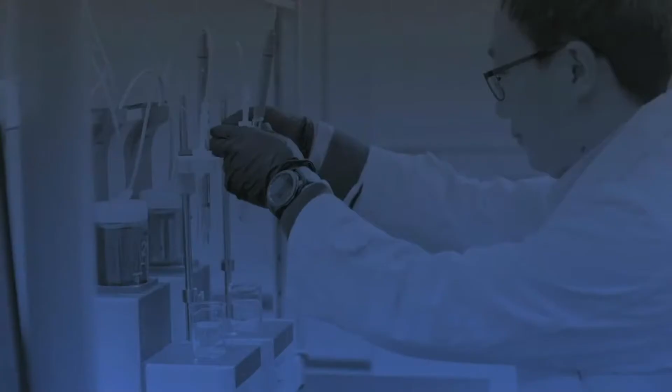Even before the current global pandemic, society was in the midst of a global data explosion arising from our world of interconnected devices. The semiconductor industry is in need of constant innovation to meet the demand for high-performance processors and memory devices. Innovative solutions developed in a rapid time frame is a must.

Additive manufacturing is one technology which fits the bill by overcoming the current design, manufacturing, reliability, and cost limitations associated with the current technology solutions.

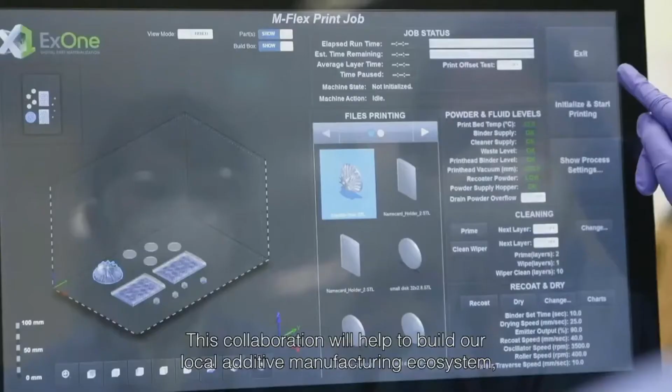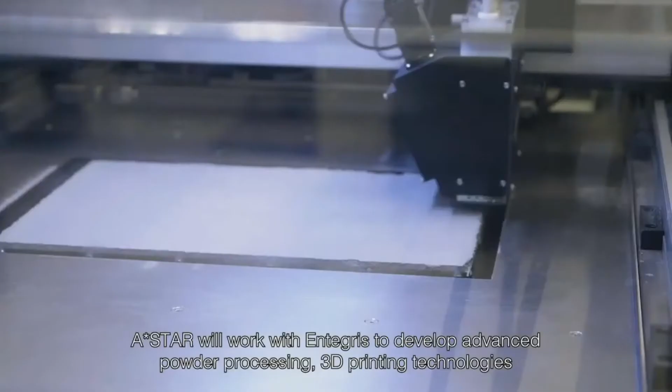This collaboration will help to build our local additive manufacturing ecosystem where Entegris can undertake high-mix, low-volume manufacturing of high-value products in Singapore. A*STAR will work with Entegris to develop advanced powder processing, 3D printing technologies, and testing methodologies for the next generation filtration-related products in Singapore.

We believe this collaboration will strengthen Singapore's presence as a reliable R&D hub for test bedding and development of new innovative processes and products in the world. This will be a solid testimony for our local research capabilities and strong partnership with the industry.

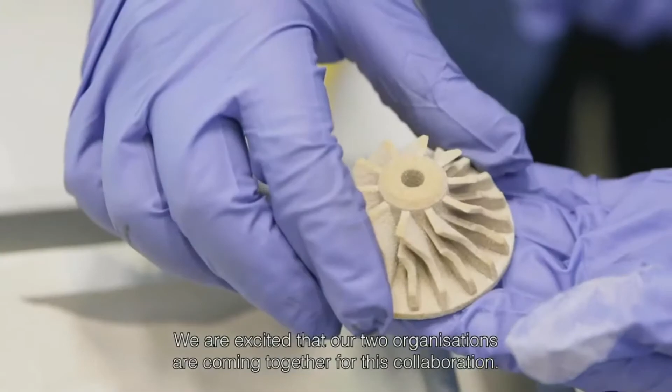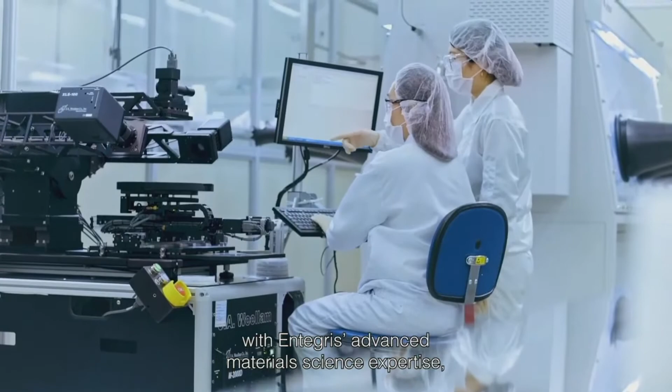We are excited that our two organizations are coming together for this collaboration. Combining SIMTech's deep expertise in additive manufacturing with Entegris' advanced materials science expertise, this would enable the exploration of a much broader array of innovations in product design, with the ability to simulate their performance before creating prototypes.

Such research could identify ways to overcome the current design constraints in traditional manufacturing and lead to discoveries that benefit a wide range of industries, including semiconductor, aerospace, medical, and energy.

With the signing of the MOU, we have fully embarked on the process of joint collaboration formation. We expect the collaboration to yield tangible results in early 2021.

One aspect of this collaboration will focus on the development of additive manufacturing technologies to enable more complex geometrical designs for metal-based membranes and gas filtration solutions.

We expect our research to lead to discoveries that will benefit a wide range of industries and emerging markets. We are certain this joint collaboration will position both SIMTech and Entegris as leaders in the additive manufacturing domain.

We wish the very best for a successful collaboration between Entegris and SIMTech in their journey together.

As part of NAMIC's ongoing efforts to develop and expand the ecosystem and seed adoption, we run annual AM competitions together with our strategic partners.

The most recent competition I want to highlight today is the Global Maritime AM Challenge Rescue Vessel Design Competition. It was envisioned to spur additive manufacturing-enabled innovation in naval architecture and marine vessel design by developing new, efficient designs for rescue craft, utilizing the advantages of AM to create a more compact vessel with autonomous capabilities, better designed for human rescue in difficult waters.

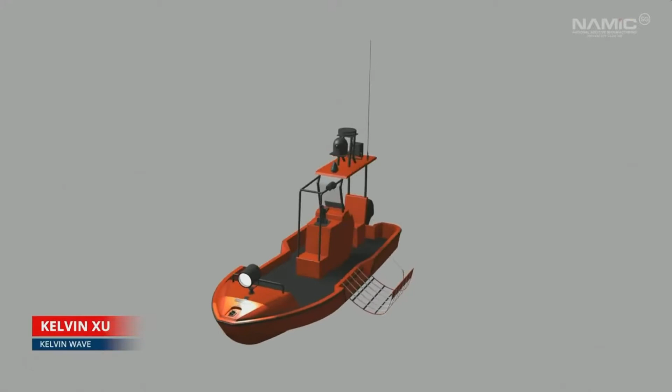KW5.78-60RB has a length of 5.78 meters, breadth of 2.2 meters, and depth of 0.67 meters. It has a fuel capacity of 48 liters to last 4 hours of operation at a speed of more than 8 knots, and can carry up to 8 personnel on board.

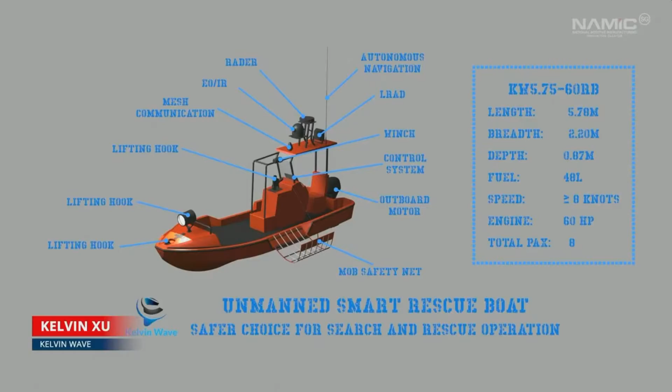KW5.78-60RB has a unique rescue zone with a side shell cutout with a lower slope to allow smooth recovery of personnel at sea without compromising the freeboard design. With the help of an electrical winch to hoist the man overboard safety net, this allows the rescue operation to be totally remote controlled. Now I pass to Kelvin to share more.

Hi everyone, my name is Kelvin Xu. I'm an architect from Kelvin Wave Private Limited. I'm very delighted and honored to receive this award from NAMIC's Global Maritime AM Challenge. A special thanks to the organizers and support teams for providing us such a great platform to showcase our innovative design and ideas, which can be manufactured by 3D printing.

It's a new game changer in the boat building industry, driving towards less waste, less cost, and less time in the manufacturing process. It allows naval architects like me to pursue high precision, better weight control, and good quality of boat design. We are looking forward to designing and building more boats using additive manufacturing in the near future. Once again, we're grateful to the organizers for offering us such a great and inspiring journey. Thank you very much.

Next up, walking away with a prize of $20,000, is Sovereign Group from France. Their submission, Sovereign Search and Rescue New Generation, has earned them first runner-up. Let's hear from their team leader, Matthew Collin.

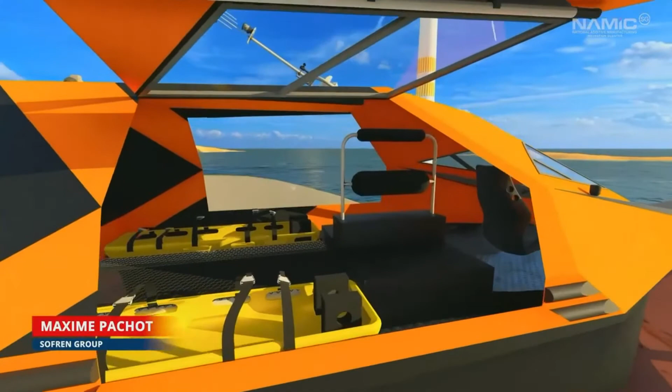It has 3 modes of piloting: classic, with a pilot inside; remotely, from another boat or ship; and fully autonomously. We have innovative features like large butterfly doors, and a net to deploy backwards to receive people at sea.

3D printing was very important for that design, because the propulsion means are fully protected with tunnels now, and all the compartments and deck can be fully printed. We'd like to thank everyone who would be interested in advance to discuss this design with us. Thank you very much, and see you very, very soon.

Finally, coming in first place from France, we have Benjamin Cann with his entry Nemo 3D, a fast and smart additively manufactured search and rescue boat. I'm sure he's eager to share his design with all of us today, so let's bring him on.

Well, it's a true honor to have won first place. It was a very exciting challenge for me, and I did my best to fulfill the requirements. I can only deeply thank the NAMIC team and challenge committee members for taking the time to consider my application and appreciate its value.

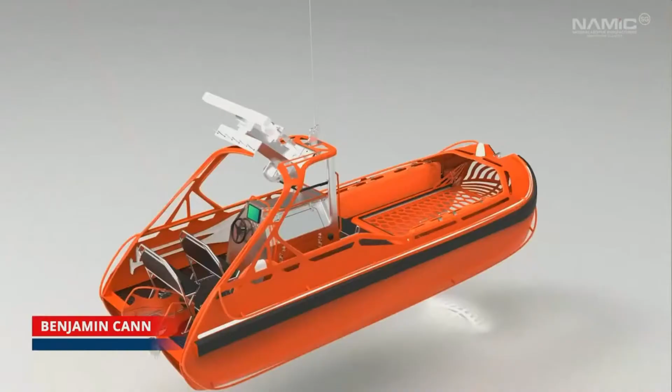It is the first time I designed anything linked to marine application, and it was a pleasure to discover this new field of engineering. I hope to see this vessel for real, and I'm sure it will prove to be very useful and save people. In fact, I can already imagine derivatives of this vessel that are fully unmanned, more compact, without crew or pilot seats.

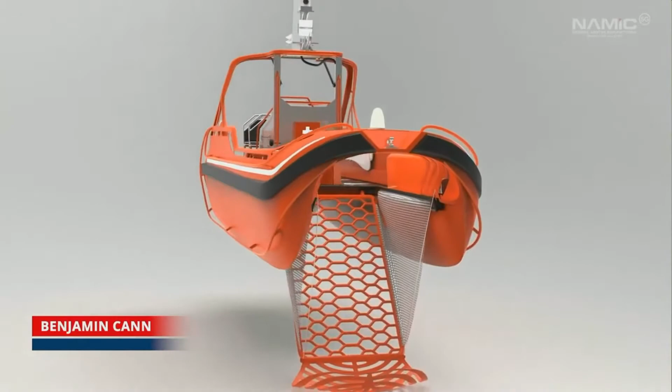It could be a real game changer for rescue vessel designs. Additive manufacturing in marine application will definitely bring more design flexibility and shorter lead times. Most structural parts can be directly manufactured on site with one single machine. It allows a high in-house manufacturing depth - that's a dream for project leaders and engineers.

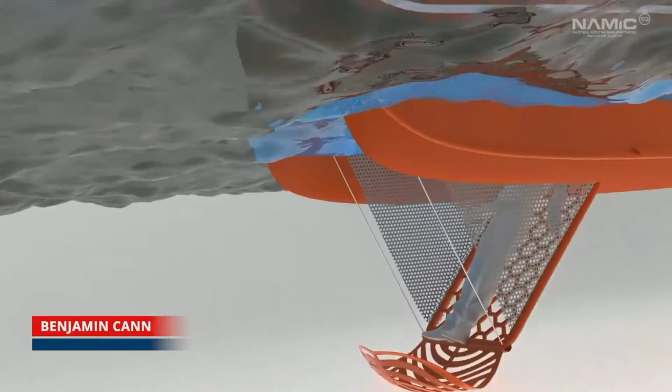I would like to thank also my family and friends for supporting me through this great competition.

Thank you all. With key players in their industries joining hands to innovate using additive manufacturing, such cross-industry partnerships will surely serve to take AM in Singapore to new heights. Now, with these recent developments in AM, many of us will be keen to find out how AM has developed on a global scale and what role AM plays in particular in Singapore.

I'm delighted to introduce our esteemed keynote speaker, Mr. Tan Kong Hwee, the Executive Vice President of Singapore Economic Development Board. EDB has been instrumental in attracting global MNCs and strategic companies to build a world-class manufacturing ecosystem right here in Singapore. Mr. Tan has been part of this development and had overseen the growth of Singapore's aerospace, land transport, and marine and offshore industries. With years of experience in EDB, we look forward to Mr. Tan giving us a closer look.

He will share with us the transformative role of additive manufacturing in enabling a sustainable future in the post-COVID world. Let's hear from our keynote speaker, Mr. Tan Kong Hwee. Kong Hwee, it's indeed our privilege to have you here as our keynote speaker today. I'm sure you've got lots to share with our audience who are tuning in today. And so the stage is all yours. Take it away, Kong Hwee.

In the plastic space, this is being taken up a step further through efforts on sustainable polymer feedstock, which are plastics made from renewable plant matter rather than petroleum. Careful consideration of feedstock choices according to end-use applications can reduce over-engineering. In fact, advanced materials, whether used in conventional or additive manufacturing, have high performance properties but are typically harder to produce, and they have a higher carbon footprint, and may not necessarily be the right material to use for every application. Unlike conventional processes, additive manufacturing's ability to produce multi-material parts enables optimization of function and carbon footprint.

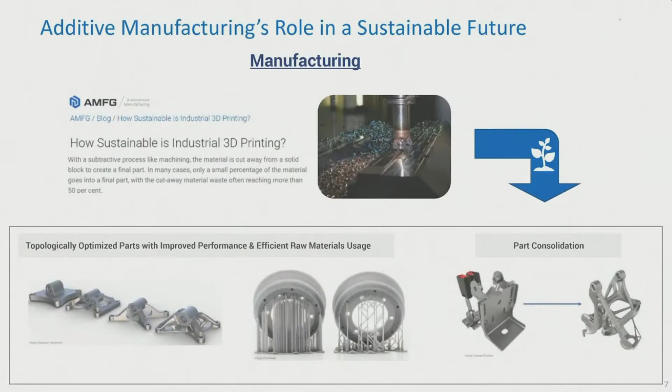On the manufacturing front, conventional subtractive processes tend to result in over 50% cut-away material waste. As a controlled layer-by-layer process, additive manufacturing can achieve significant reductions in material wastage. For example, in the aerospace industry, additive manufacturing is predicted to save as much as 90% of raw material required in manufacturing by 2050. Moreover, the design freedom enabled by additive manufacturing allows for performance-optimized parts which require less feedstock, and part consolidation further increases material savings as well as reduces assembly processes.

These efficient designs translate to lightweight but durable parts, which in turn leads to significant savings in fuel consumption and carbon emissions in industries such as aerospace and automotive, where routine usage of additively manufactured parts have been proven to reduce fuel consumption by up to 7%.

Finally, the transportation component represents potentially the largest impact on carbon footprint reduction. The transport of goods and people, which primarily involve road, rail, air, and maritime, account for over 24% of global CO2 emissions, and it poses a serious challenge to the Paris Agreement goals. Additive manufacturing is digital in nature, and it disintermediates product development cycles to go directly from design to decentralized production located close to consumers and end markets.

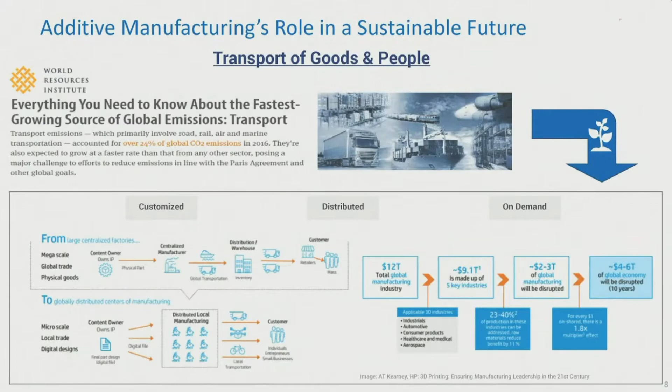Studies have shown that a quarter of the $12 trillion global manufacturing industry will be disrupted and redistributed in the future due to growth of additive manufacturing. This distributed digital manufacturing paradigm not only results in shorter lead times, but significantly drives decarbonization as transport of goods is replaced by transfer of digital design files. Moreover, print-on-demand capabilities will eliminate the need for inventory stockpiling and associated materials use wastage.

Next, let me share briefly on Singapore's additive manufacturing journey. Manufacturing has remained an integral part of Singapore's economy since our independence, accounting for close to 20% of our gross domestic product in 2019, and this will continue to remain at about 20 to 25% of the economy.

In several industries, Singapore has established a global leadership position. For example, we account for about 10% of the global market for aerospace maintenance, repair, and overhaul. About 25% of the global output of semiconductor equipment comes from Singapore. We are also a top refinery export hub globally, and we are the fourth largest exporter of high-tech goods, such as pharmaceuticals, electrical machineries, and telecommunication devices.

When Singapore first articulated seeding the additive manufacturing industry here in 2013, it was primarily motivated by our need to sustain competitiveness of our key manufacturing sectors and to secure additional value capture for the economy through the supply of additive manufacturing technology. To achieve this, the Singapore government has invested close to 500 million Singapore dollars to build a robust additive manufacturing hardware and software capabilities and talent expertise in a local research and development ecosystem.

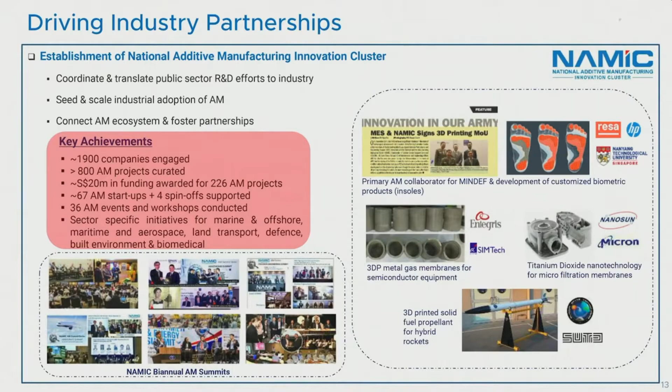To promote industry partnerships, enhance technology transfer, and scale industrial adoption, we established NAMIC, our National Additive Manufacturing Innovation Cluster. As a conduit for government's efforts, NAMIC has played a significant role in the success of our strategy. It's engaged close to 1,900 companies, curating over 800 industry projects, providing up to 20 million Singapore dollars in funding for projects and sector-specific initiatives.

For example, the Land Transport Authority, LTA, formed a consortium with the railway operator SMRT and German MNCs TÜV and ThyssenKrupp to develop print-on-demand capabilities for our trains and automotive systems. Successful proof of concept have already been demonstrated for train gap filler brackets and aircon ventilator caps.

Furthermore, an MOU has been signed with Mobility Goes Additive, a leading international network of additive manufacturing companies and research institutes, to develop a database of spare parts which can be 3D printed for savings in lead time and inventory costs.

In the marine, offshore and maritime space, Sembcorp Marine, a leading marine and offshore engineering group, has received certification for its capabilities in additive manufacturing repair procedures and 3D printing of large format marine parts.

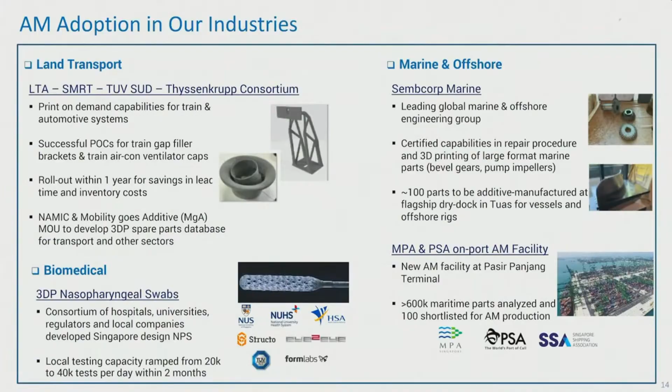In a similar vein, the Maritime and Port Authority and PSA of Singapore will jointly establish the world's first on-site additive manufacturing production facility specifically for port applications. Over 600,000 maritime spare parts have been analyzed and 100 shortlisted for 3D printing. These efforts will reduce the sector's reliance on external procurement and supply chain risks.

In the past few months of COVID-19, much attention has been on the healthcare sector, given the global shortage of medical devices due to demand surges. This is where NAMIC had worked closely with our hospitals, universities, regulatory bodies, and local companies to develop a Singapore-designed 3D printed nasopharyngeal swab for test kits. With a short production development cycle of less than 2 months, additive manufacturing helped Singapore rapidly increase our swabbing capacity.

Our early investments in additive manufacturing and R&D have put us in good position to capitalize on the economic opportunities of 3D printing, shore up supply chain resilience, and most importantly, equip our industries for sustainable growth.

Transforming our industries, economy, and society towards energy and carbon-efficient operations, harnessing low-carbon technologies as they mature, and pursuing effective international collaboration form the 3 key thrusts of our national long-term low-emissions development strategy.

Despite one of the lowest carbon emissions per GDP dollar, Singapore remains fully committed to doing our part to address climate change. The low-emissions development strategy outlines our goal to peak emissions at no higher than 65 million tons of carbon dioxide equivalent by 2030. And we are planning to halve it by 2050, with a view to achieving net zero emissions as soon as viable in the second half of the century.

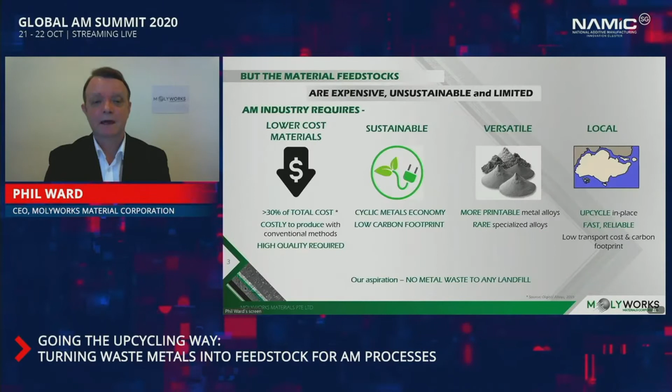What we believe the additive industry would like in terms of materials is obviously lower cost, because that's a significant part of the overall cost of the produced parts, since conventional methods of making high-quality powder are expensive and also have a relatively high carbon footprint.

Current production is not sustainable, as it demands input feedstocks of mined and processed metals as part of the linear economy. We want to enable an entire cyclic metals economy for all alloy types with an extremely low carbon footprint, and we want to enable the industry to print with more varieties of alloys which can be tailored more closely to the application. There are hundreds of alloys available for subtractive manufacturing, but very few in additive manufacturing so far. So we want to be able to produce on-demand, customized, rare and specialized alloys—for example, high-temperature refractory alloys—and wholly new alloy formulations for the industry.

In the future, we also want to be local, because the distributive nature of powder production is going to be very important from many aspects, including resilience of supply, speed to deliver, low cost, and low logistics footprint. We want to be able to upcycle scrap in place, creating the additive powder needed by the manufacturing industry using its own waste metals as feedstock. Finally, a big aspiration we think should be embraced is to see no metal waste going into any landfill in the future.

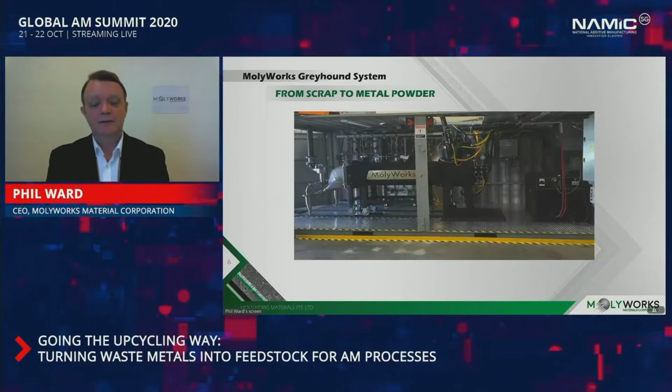Molyworks is now coming into this equation with a machine which can take scrap metals in any form and ingest them in a one-step process to produce metal powders for the additive industry. We add only energy, so now we're enabling the original concept of the cyclic economy for metals, with our device used in conjunction with the 3D printing industry.

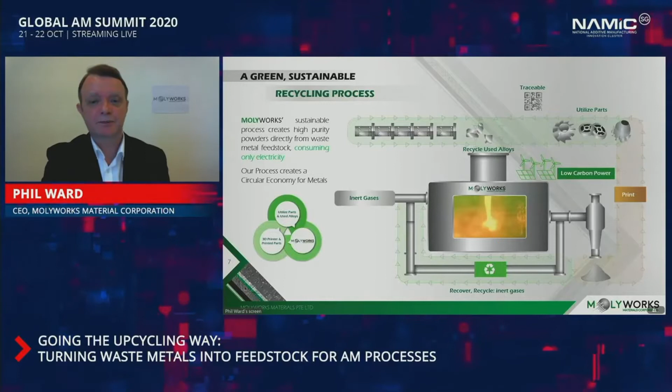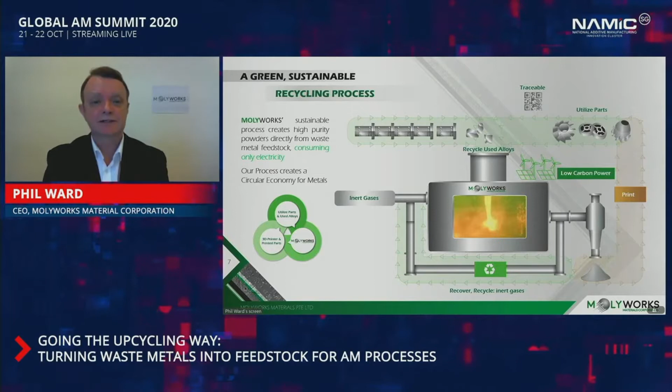How does that work? We've invented a custom process through five years of research where we ingest metals through special feeders into a molten pool created with plasma and atomized with our custom process using inert gas and some secret technology. The inert gas can be recycled because by its nature it's inert, and out comes the powder for the 3D printing industry—or we can print the parts ourselves, having various printers and capabilities in-house.

The parts go on into the economy, and once used, they can come back to us. If we print a QR code on the part, then we can always trace who made the part and what materials are in it, which helps us with a more efficient ingestion of scrap in the future. If not, then we can still use the lab to make sure the chemistry going into the machine is exactly what we want it to be.

So this process creates a very elegant circular economy for metals, working together with the 3D printing companies of the world, in the sense that the only thing consumed here is power, which can be very low carbon. In fact, where we're located in California, it happens to be 97% carbon-free electricity, and that's all we add into the scrap to turn it into powder.

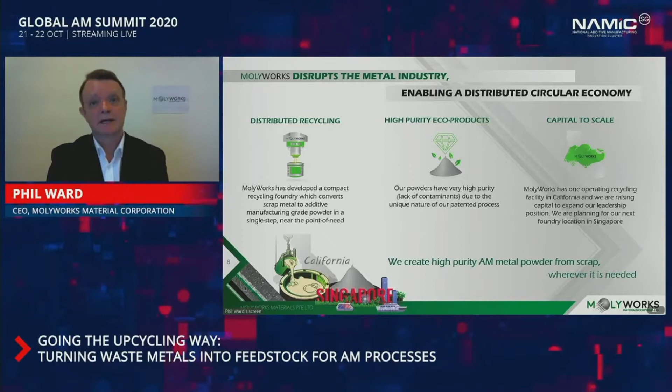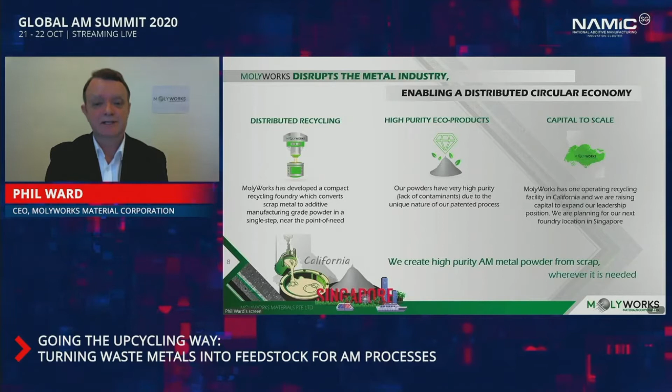We disrupt the metal industry by recycling, and we can distribute this recycling because the foundry we've built is small, compact, and fits into a horizontal shipping container—all of which don't apply to current methods of making 3D printing powder. We can maintain high purity because what goes in is normally a good quality alloy, having been used in industry already, and we have an opportunity to still remove contaminants during our process, dilute anything we wish, even add other metals via master alloy mixes, and when melted it doesn't touch anything else but itself until atomized, producing very high quality powders with the chemistry we want.

We have one of these machines operating successfully in California, and we're expecting to locate the next one here in Singapore.

So where will we get the raw materials for this mobile foundry, as we call it? Well, taking titanium as an example, it has a high scrap rate. As it happens, more than half the titanium purchased will be scrapped, partly because the buy-to-fly ratio in aerospace is so high—quality titanium scrap is available at less than $7 a kilo, often much less than that. And the price of the AM powder is typically $150 or much more, depending on the grade of the powder and the exact alloy. So within that range, there's a lot of room for Molyworks to work and to obtain good efficiency to help the additive industry get the cost of its raw feedstocks down.

But before we even get to cutting up and dismantling airframes, just pure industrial scrap exists at a very low price all over the world, wherever metals manufacturing exists. And we can buy that already clean, or we can have it cleaned.

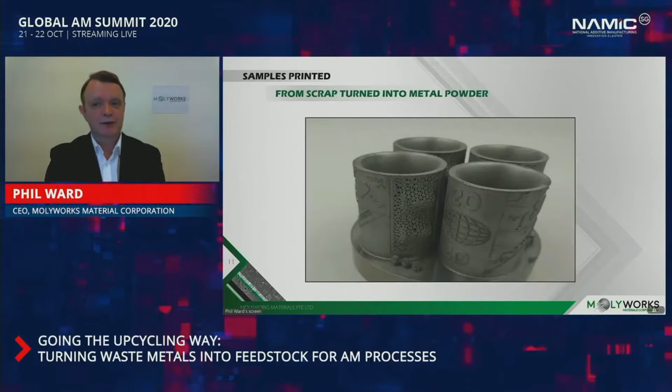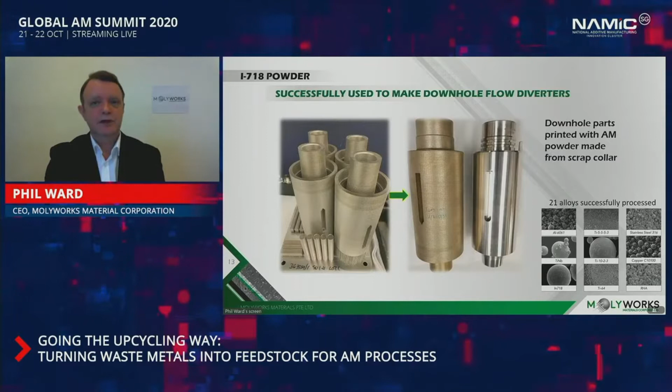And here are some of the parts that were made out of the powder from that drill collar. These are oil field downhole flow diverters, which were then run successfully. And we've produced 21 alloys successfully so far, and we think that there's no reason we can't make almost any alloy with this process.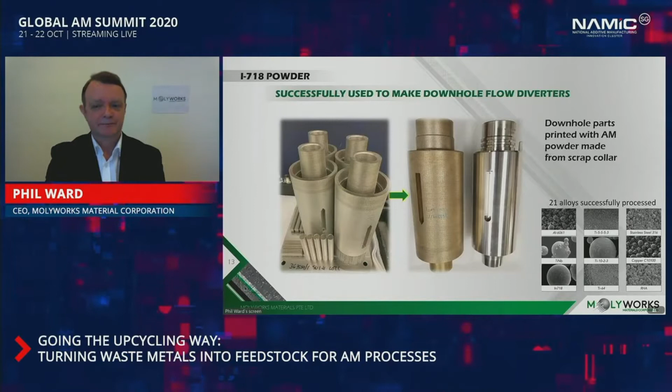If we look at a concept of the whole process, we start with sustainable manufacturing and we ingest all the types of scrap that we've mentioned into these recycling foundry machines, which are spread around the world and located where the demand for powder is or where the sources of scrap are present, ideally where both of those occur. We'd use just energy, and so we come back to the Star Trek replicator machine concept to output feedstock, which can then be used with 3D printing machines, which again consume energy to produce the parts.

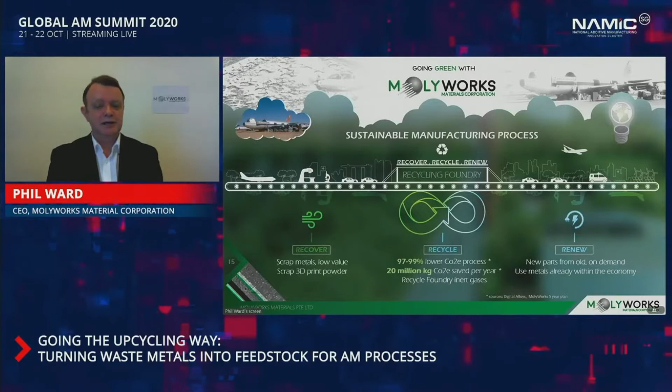This future world, which seemed like science fiction not so long ago, is possible now. The process has at least 10 times less carbon footprint than the linear economy today, even using fossil-based energy, and can be nearly 100 times less using low-carbon energy.

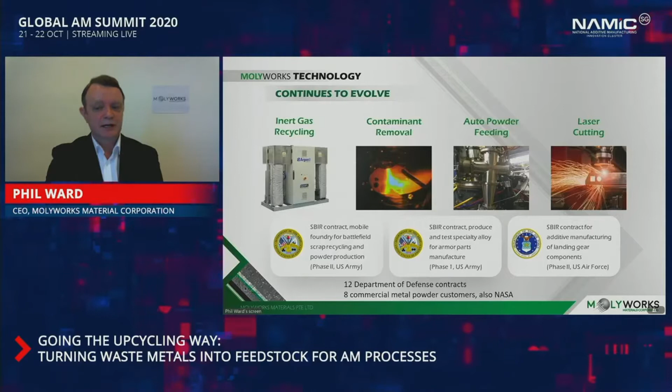We continue to evolve the technology as we work on deploying this in various scenarios, with the next one here in Singapore. We have ongoing Department of Defense contracts to help us evolve and test alloys and the technology. And more recently, we've added 8 commercial customers, as well as a contract with NASA for specialty space materials.

Our team has a very strong background in metals, engineering, and business. Our founders are all still with the company, and all of us are very excited to bring this technology to Singapore for the benefit of the Asia-Pacific region. Thank you, and I look forward to the discussions.

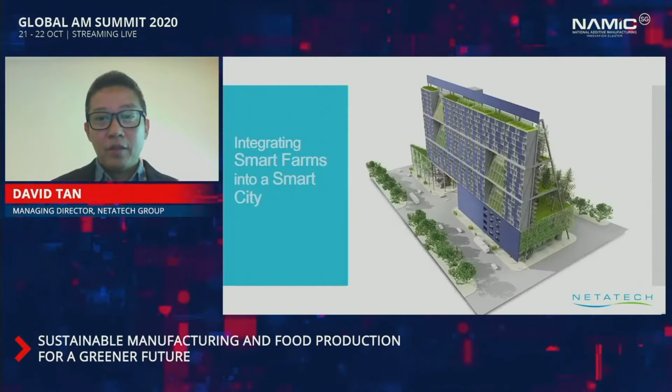Smart farm in a smart city cannot go without digital integration. Farm IoT, machine learning, artificial intelligence are all part and parcel of these future farm technological stacks.

We will see many small and decentralized farms work cohesively and cooperatively via shared services to produce food near where produce will be consumed, so to reduce supply chain wastages.

As a result, we hope that these farms will produce quality food at an affordable price. This will encourage more communities to get into farming and together develop a vibrant food production industry.

We will encourage more young professionals to join force and make urban farming a mega industry, just like FinTech or the Deep Tech.

Sustainability and clean will be mandatory criteria in urban farming. Less water and energy will be used, and the production will also be less influenced by unpredictable climate.

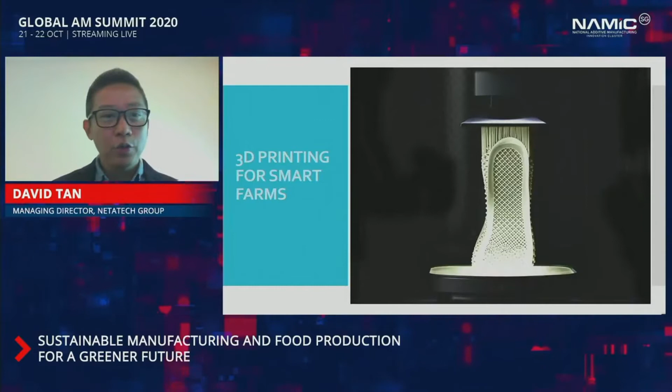Now, what happened to 3D printing? Having painted all this background, I would like to describe how 3D printing can be adopted or exploited in urban farming. Let me walk you through two real-life projects we are embarking on to give you a glimpse of what the future holds.

Seafood is one of the major protein sources. Singaporeans love it, and currently most of our seafood supplies come from neighboring countries. Land-based fish farming is on the rise, and we will see more aquaculture farms go inland and stack upwards. Technologies such as recirculating aquaculture system, RAS, are not new. However, putting RAS in a vertical factory - not many have embarked on it due to high costs.

To stretch the goal further, beside building upwardly, we are now looking at growing upwardly within the vertical structure itself, meaning verticals within verticals, which will result in a multiplication effect. Let me elaborate further.

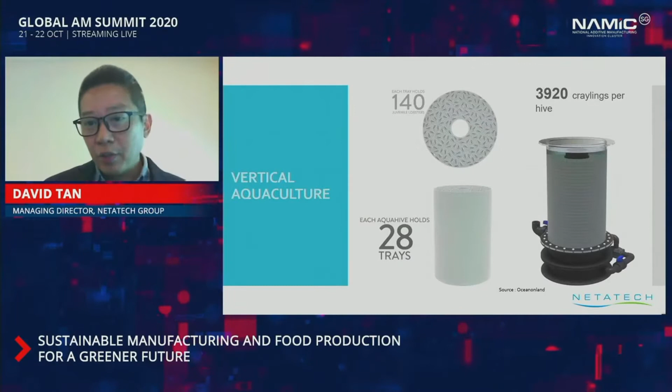This is an example of a crayling hatchery, which is vertical. The system is called AquaHive by the company called Oceanonland. They developed vertical habitat trays that can hold 140 craylings in one tray, and is stackable up to 28 trays per nursery system. Due to the craylings being cannibalistic in nature, this system will reduce mortality rate by at least 80%.

If you look closely at this tray, you will notice it is a potential for 3D printing technology. By studying the habitual nature of the craylings, aquaculturists can then experiment and design different habitat structures to optimize yield per meter cube of water and reduce mortality rate attributed to cannibalism.

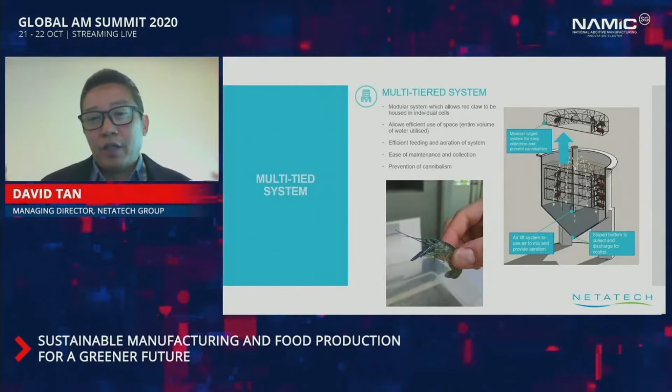As craylings grow, they will need to upgrade to a bigger space, just like we human beings. We can then devise new apartments for them. They will grow safely and happily. From this example, you can see that they are isolated yet able to socialize with their neighbors.

For spaces such as rooftop, where load bearing is a constraint, we can create horizontal spaces for them to grow comfortably in as well.

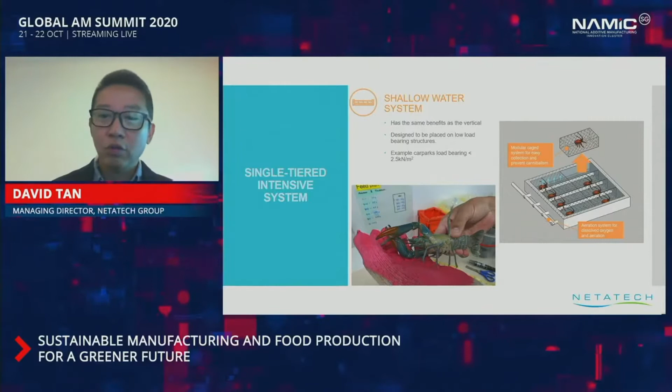Now, in a normal earthen pond in Australia, crayfish harvested yield averages about 250 grams per meter cube of water due to cannibalism and high mortality rate. But in our vertical farm system, the potential is 15 kg per meter cube of water, and hence we can achieve 60 times more efficiency than the traditional earthen pond method commonly practiced worldwide.

Now, how about agriculture? As for the agriculture industry, Asian green leafy is Singaporeans' main source of fibers. Stir frying is a common way of cooking these vegetables. Innovation for this industry is typically hydroponic, grown in high-tech greenhouses, indoor farm with LED lights, or vertical furniture within the greenhouse structure itself.

This is our current innovation project called Vertical Food Stage. We utilize the unused gable end wall, which is the western-facing wall of the residential apartment, to erect a modular structure whereby we can farm within each level of the structure vertically, and to maximize the usage of surface area. We use natural sunlight for these projects, and we supplement it with LED to maximize the yield.

Now, when you look at it, even though this structure is very functional, it does not look really attractive or creative if we were to populate this structure throughout the whole housing estates.

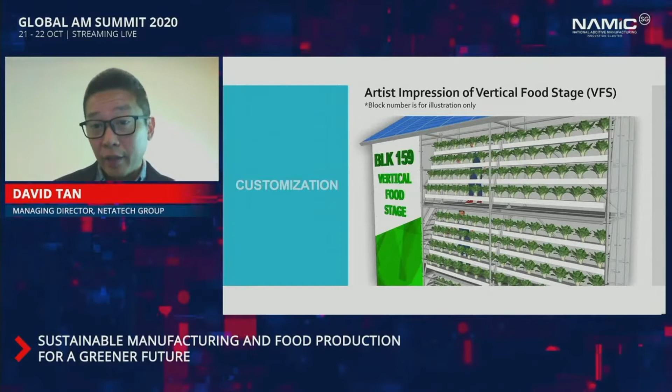Now, as for the farm growing furniture inside the vertical farm, many components can be created and customized to improve efficiency and yield. Just like this American company called Farmshelf has already leveraged on 3D printing for hydroponic pots, aerators, vents, and etc.

In our research calculation of the yield of vertical farm, we are able to produce more than 10 times per square meter than the traditional farm.

Now, how about 3D printing standards? Over the course of the last few years, additive manufacturing has emerged as a catalyst in reshaping product development and the manufacturing business model itself. But for 3D printing to truly achieve its potential, I believe a set of widely accepted comprehensive standards should be developed, the absence of which may hinder large-scale adoption of this technology.

With the advancement of Industrial 4.0 and the digitization of inventory, AM will reshape product development and not only for prototyping. Over the course of the last few years, additive manufacturing has emerged as a catalyst in reshaping product development and manufacturing business model itself. But for AM to truly achieve its potential, a set of widely accepted comprehensive standards should be developed, the absence of which may hinder large-scale adoption of the technology. Now, with the advancement of Industrial 4.0 and digitization of inventory, AM will reshape product development and not only for prototyping.

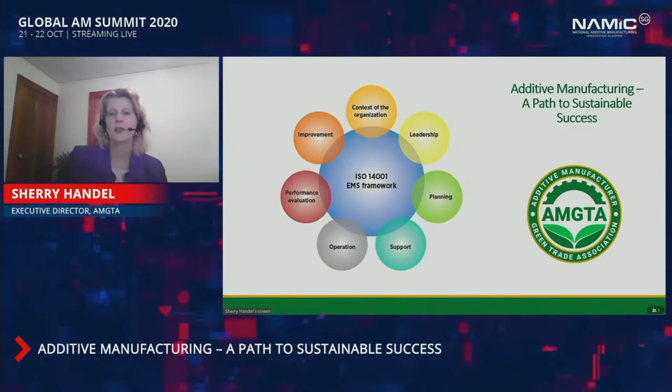As more companies in the AM industry adopt the ISO 14001 certification, not only are they improving sustainability within their respective companies, but they are also serving as industry leaders in advancing sustainability in AM. As the ISO 14001 certification is becoming more well-known, there are more certification companies offering training, audit, and certification services for environmental management systems.

Sustainability initiatives can start with any employee within the company, sharing an idea on better ways to do things that are less negatively impactful to the environment. That employee could be anyone, the shipping clerk, the receptionist, an engineer, or the CEO.

But the sharing of an idea by an employee is not enough. The key to creating a sustainable culture within a company is for leadership to continually encourage employees to voice these ideas and suggest initiatives that will improve the environmental footprint of their operations.

For successful idea implementation, companies need to set up a process whereby employees are encouraged to contribute ideas. Each idea is carefully considered, feasible ideas are implemented, and there's a way to communicate with all employees in the workplace that the idea has been implemented and show how it's making a difference in improving the company's sustainability.

To have the most impact, management needs to consistently evaluate and improve sustainability efforts on an ongoing basis. Visionary industry leaders are constantly challenging their team members to find new ways to reduce waste by repurposing or recycling used materials, improving the manufacturing environment for their workforce, shortening the supply chain to reduce the distance parts and products travel, finding innovative ways to use new materials including biorenewables, and other creative solutions to become more sustainable. These initiatives have led to an increase in value-added parts, products, and services.

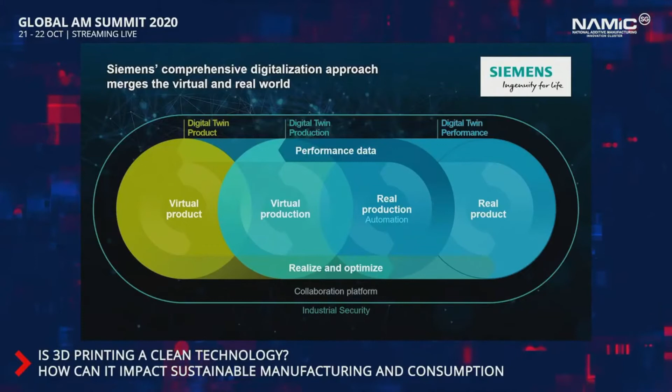We at Siemens follow a full holistic approach from the digital twin of the product, the digital twin of the production, automating the real production, and then feeding data and the digital twin of performance back into the systems to continuously improve. What does it mean?

It's about a comprehensive, seamlessly integrated tool set of software to design and simulate these products. It's about automating the machines and the production lines with components and software. And last but not least, it's about industrial edge cloud digitalization solutions to monitor and maintain continuous improvement and high quality of the production process.

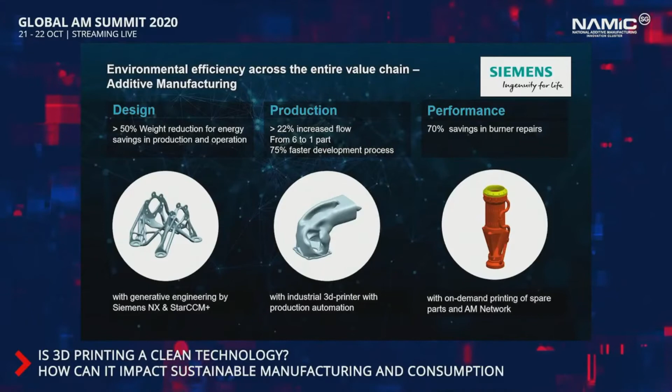Let's step into three examples where I can explain the role of sustainability in additive manufacturing. Here you see three examples from left to right. It's about the design and really reducing the weight and the use of material.

Let's start with this first example. Take a gearbox and you have a bracket for this. In conventional manufacturing, this is produced with 9 individual parts in a massive way. With the right tools of additive manufacturing, it's possible to generate these bionic structures. With this, you're lowering the weight by 50 to 60%, having the same stiffness, but only one additively manufactured part.

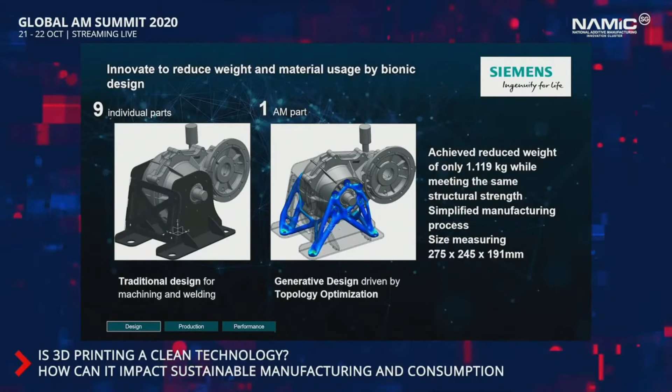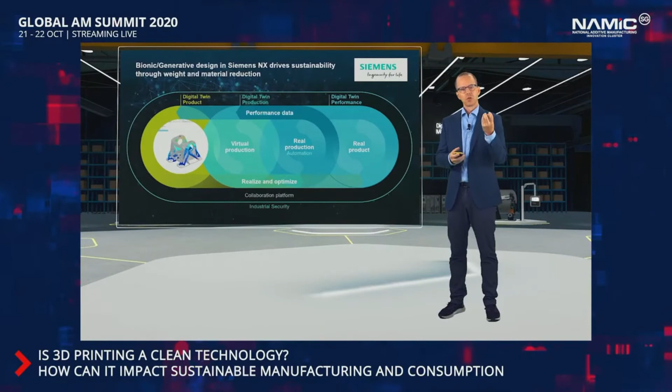Let's go into the workflow, as I explained, from left to right, from the digital twin of the product. So you need to incorporate the old design into our Siemens software suite, and then reiterate with the right tools for generative engineering to go from the old design to these bionic structures, as you see here in the short movie.

However, before going into the printer, you need to be sure that there's no distortion, and this can already be simulated in the software, so you can find out if there's any problem which may occur later on in the production process of the printer.

Even further, this software is seamlessly connected with the latest machines from Farsoon, and these machines producing these parts are as well automated with our latest and greatest automation technology. The result is, as I mentioned, only one part, less material consumption, and reduced weight for the later performance — a big impact on sustainability.

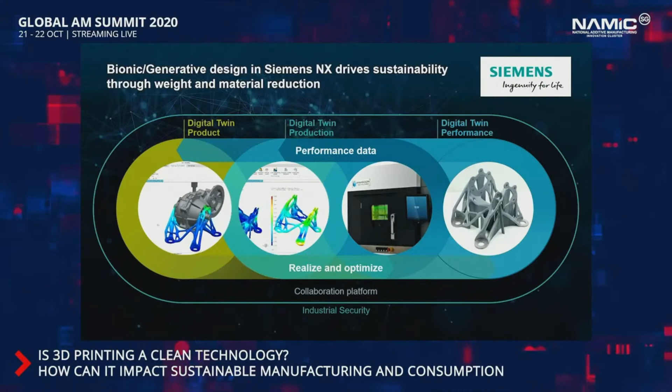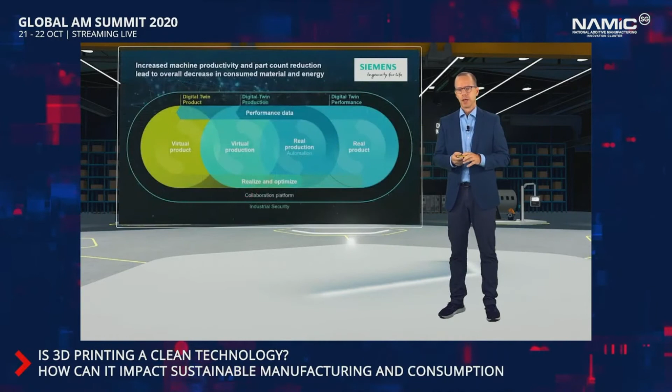Now we move through the same workflow, and let's look at the impact. Starting once more with the workflow in Siemens NX, where you start with the old design, then use STAR-CCM+, a software suite which optimizes the part by its flow. You keep some corner conditions constant, and then come up with a fully reinvented design for this part. Here you can already simulate the performance behavior, but you're not always sure if you can actually print it.

You need features in the software for the digital twin of the production to find out if this part is really printable. We have design checkers, and we have the digital twin of the HP machine incorporated in our software, so at this point you can already find out where later problems may occur in the printing production process.

Even further, you can automatically put serial numbers onto these parts, and automatically nest these parts to achieve the most comprehensive density in your printer for the actual print job later on.

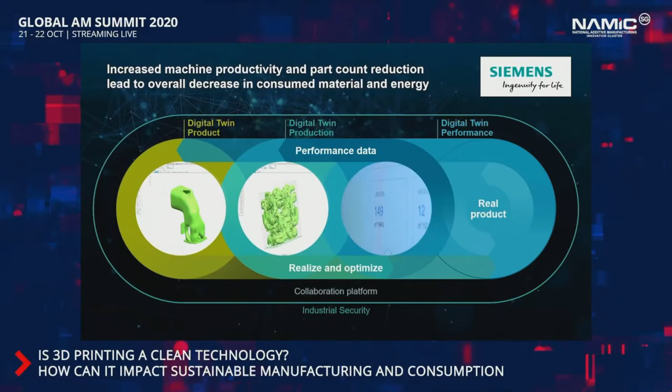This part is then incorporated and used in the latest HP printing technology. It increases the flow by 22%, which leads to better performance, higher speed, or lower power consumption of the printer itself. If you consider, as shown here in the digital twin of production, that you have many of these printers working, it's gaining a lot of productivity and making the shop floor much more sustainable in the production area.

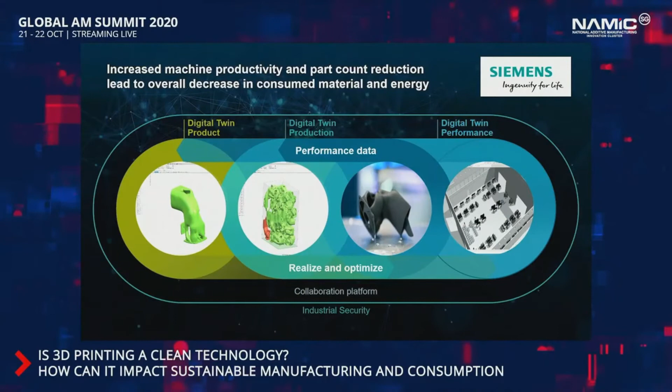Let's move into a third example. Our colleagues from Siemens Energy are very active in terms of the service business for additive manufacturing.

Just assume how many parts are stored worldwide in all the service logistics centers and never used. All the energy is already used, the material is already used, and you store it for decades. This is pure waste and an inefficient way of using material and energy.

You start with a lot of parts, which is a conventional part. You reiterate, and the colleagues in the Siemens facility in Finspång have done this quite well. They started with a repair process, and in the meantime, the full burner is printed with an even improved structure and inner structures to really optimize the gas flow.

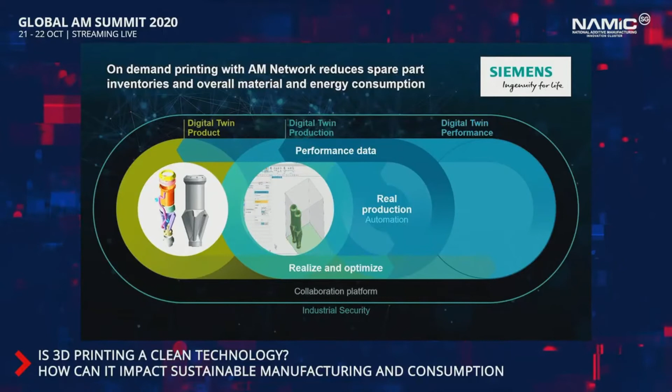Even further, you can simulate if there would be any distortion coming up in the process. The keyword here is first-time-right printing. If you want to print the part when you need it, it needs to be first-time right.

Once more, this is seamlessly connected with the latest EOS powder bed fusion printers, and these printers are running within Siemens. Overall, within Siemens entities, we have more than 200 printers running in 45 locations. And once more, the result is an additively manufactured part that generates a higher sustainability impact because you produce it when you need it, and it even has improved behavior in later production and in the field of the gas turbine.

So if you want to experience all these things, just some weeks ago, Benjamin Moy and Raimund Klein, my colleagues in Singapore from Siemens Digital Industries, did a tremendous job and opened an advanced additive manufacturing transformation center in Singapore.

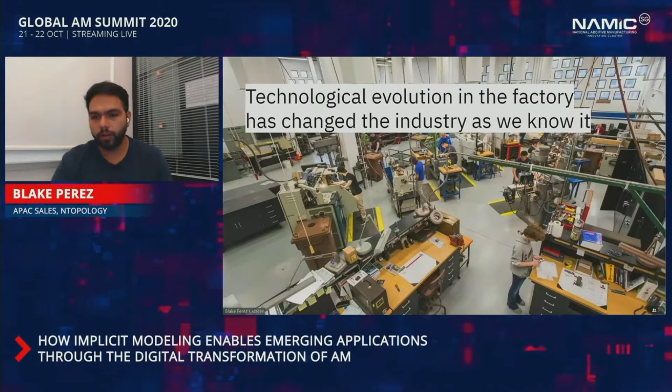I'm excited that NAMIC has us here today to talk about enabling emerging applications through the digital transformation of additive manufacturing, and what role nTopology has to play in that space. I want to give a little background on nTopology and talk about what we do and where we help in the additive manufacturing space.

Technological evolution in the factory has really changed the industry as we know it. We're used to a certain image of what a factory might look like, and it's come a long way in the past decades. We've gone from a very manual process to a very automated, advanced place, and additive manufacturing has really driven a lot of that in the past few decades.

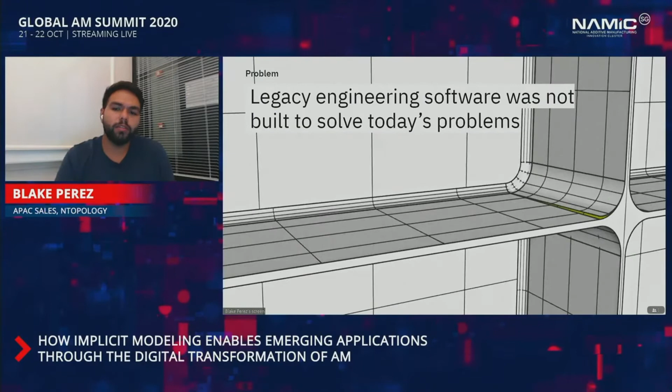The problem here is that our digital tool chain hasn't really kept up with this advancement. Legacy engineering software was never really built to solve today's problems. Even seemingly small complications with a CAD model weren't so important with older systems.

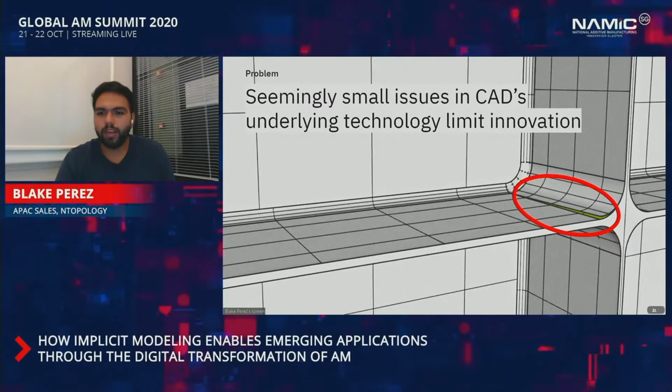But when we look at additive manufacturing and the suite of advanced manufacturing tools available today, these small issues can have large implications on the integrity of your model. So much work is spent repairing these models to make sure they're printable, and it really slows down the design process. That's what nTopology is looking to help solve.

We provide a computational modeling platform for design, simulation, and advanced manufacturing. There are three things we enable: one is high performance and reliable geometries - advanced things you might see in the aerospace, automotive, and medical industries. A field-driven approach which unifies design, simulation, and manufacturing knowledge. And finally, a platform for all of this data to work together nicely.

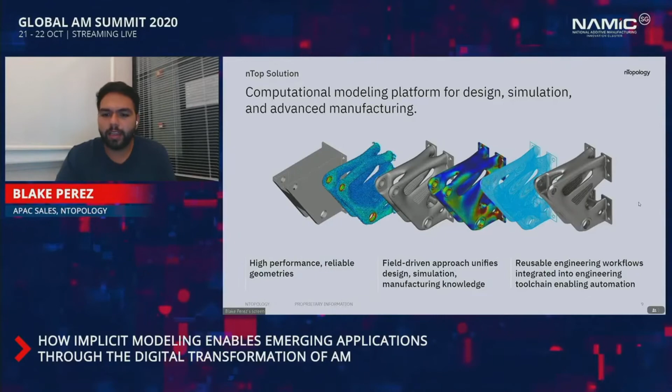When you combine those two things, what we end up with is a reusable engineering workflow that can be integrated into an engineering tool chain, enabling automation. Because our models are so much more robust than legacy CAD systems, we can start to automate a lot of the design work - not the creativity from designers and engineers, but the more repetitive tasks that plague our CAD workflows today. So what we're trying to enable is unbreakable geometry, regardless of complexity.

No matter how complex your part is or can be, our software can enable that. And the reason we need that today is because of the geometric freedoms that additive manufacturing has enabled.

So onto the topic of conversation today: how does the nTop platform contribute to and transform businesses during the pandemic and beyond? I think that's particularly relevant today - how does nTop platform help enable digital transformation? I want to start with our company's mission statement: to empower engineers to design transformative products.

Additive manufacturing has enabled the production of these products. How do we also enable the design, both efficiently and effectively? Let's look at additive manufacturing in general, and I want to list a few characteristics of the parts we make with additive manufacturing.

If we think about these parts, they're oftentimes high performance. The reason we use additive, the reason we leverage the geometric complexity, is because we want super high performance - whether that's super lightweight, super efficient heat exchangers for medical applications, or really high performance in terms of how a body might accept a medical implant.

Because of that performance, because we're trying to push the boundaries, we end up with high geometric complexity - really intricate parts, potentially really small features, very organic shapes, things we just can't really do with traditional manufacturing. This also results in high cost.

Obviously the price of additive manufacturing has come down significantly in the past decade, but when we look at part-to-part cost, it's still relatively high. As a result, we also need high quality - we need to ensure the parts coming out of our machines are of high quality.

We don't want to print multiple parts. And the places we're putting these parts - in aircrafts, in automobiles, in human bodies - they must be of high quality. And then high compliance: these industries also have their own sets of regulations.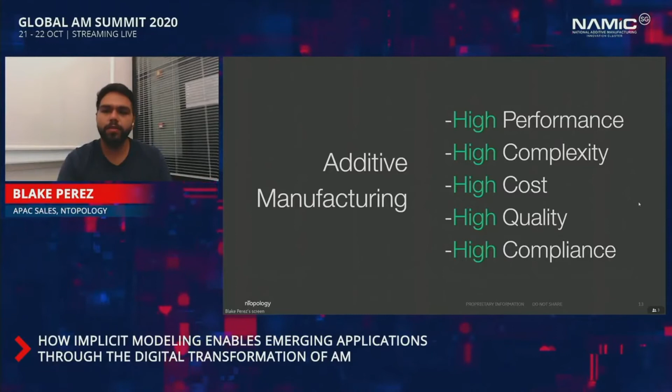We need to make sure that these parts were not only manufactured to specification, but that they continue to remain in specification throughout their service life. All of these things require a team of people, or teams of people. High performance means an engineering team, high complexity means a manufacturing team of experts on the machines, cost brings in the business side, quality means engineering and testing, and compliance potentially involves third-party regulatory bodies. All of these people need to work together. That's what I want to talk about today: how we've enabled these different teams to work seamlessly together in a single platform.

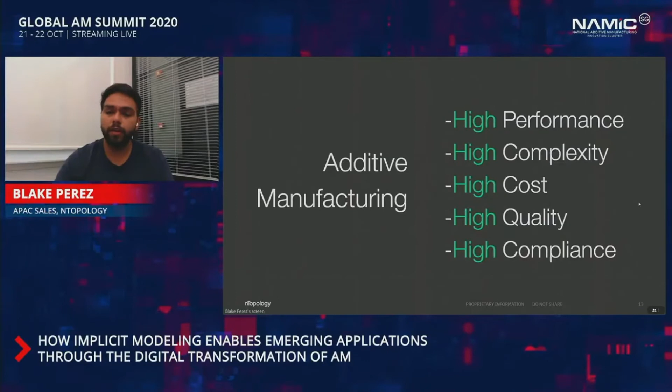I want to show a few slides that show how that narrative has evolved in the history of nTopology, which is only a few years long. This is an image from a webinar we aired about a year ago. The story here is about a part built in collaboration with Cobra Aero, who make parts and components for UAVs. What we're doing is combining all of this different engineering knowledge into a single geometry, taking thermal data, pressure data, fluid flow data, and stress data.

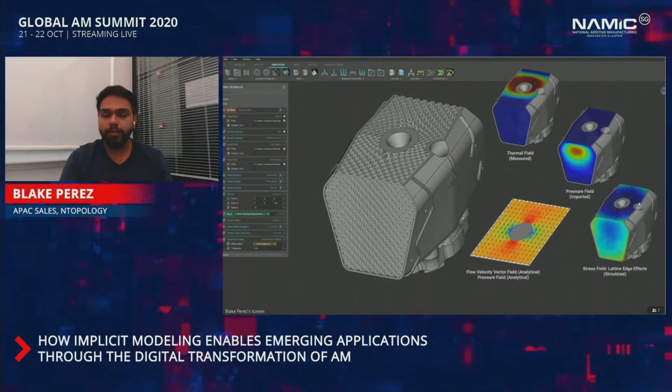We're combining this all under one platform to modify and enhance the geometry of the final product. I think this was relatively new at the time. Obviously this is a standard design process to try and involve all of this data, but being able to involve it all under one platform and letting that data directly drive geometry was a big step for us and for the additive manufacturing design space. So we're enabling designers, engineers, and manufacturing engineers all to work together here.

And that has since grown. There are other teams that want to be involved. So in this slide, we talk about a single physical part, but there are multiple data sets that can integrate into nTopology's nTop platform. In the top left, we have our topology optimization result, the result from that algorithm. We have the native solid model that exists in the implicit geometry kernel that nTopology provides.

We have that FEA, CAE validation data. Whether you do that CAE analysis in nTop platform or in another, you can bring that data in. Then we have the CAD model - how do we export a CAD model to a PLM system or an existing CAD package that any of our customers are using? Potentially tool paths, CAM files, surface scans - can we bring in that point cloud from scanning the part after it's been produced? And then also CT data - can we bring that in directly if we need to inspect the interior of a component?

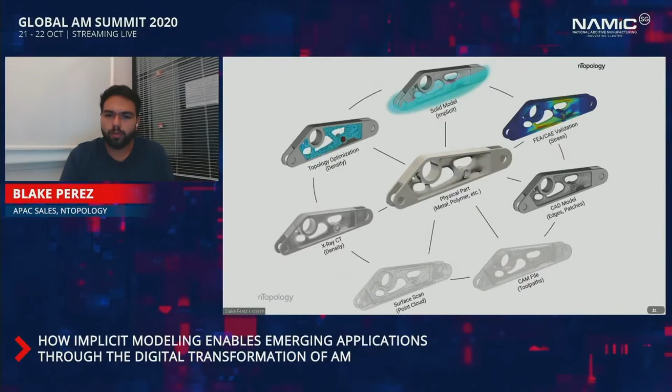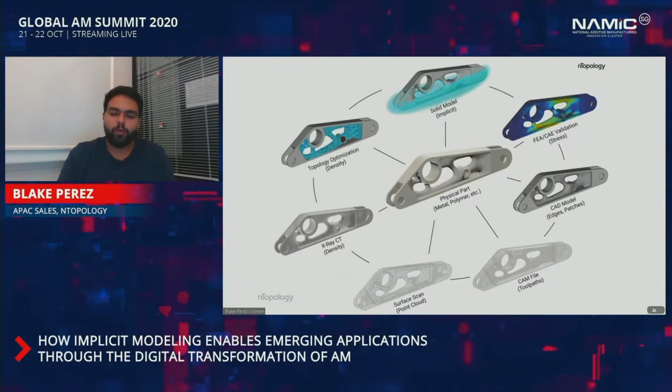What's great is we've taken the manufacturing engineer, the simulation engineer, the design engineer. We've started to involve the testing engineers, bringing in that test data, as well as the CAD IT infrastructure. It's just a great platform for everyone to work together, and that has become more important today than ever. We have the most distributed workforce we've ever had. People aren't coming into the office, people aren't able to work the way they used to. So by consolidating platforms, I think we're really helping to enable this digital transformation.

This is kind of where we are today. We look at the evolution of that narrative from a couple teams working together to bringing all of this data under one roof - CAD geometry, simulation results, experimental measurements, the material properties of the part or the material we're printing with, additional engineering data, it might be thermal. Really, if you have engineering data, if you have data from your process, you can bring it into nTop platform and make it actionable.

And the results of that are optimized geometry, highly advanced geometry. It's also validated, it can be simulated. We can create these custom applications, these custom workflows that are used in medical space, dental space because of the robustness of the platform. Then some automated processes like jigs and fixtures, being able to automatically create these things from an input geometry.

So enabling all these applications, and kind of right there in the middle is nTop platform, providing unbreakable geometry, field-driven design, and repeatable workflow. That's really the enabler to connecting all these pieces of data to final parts, final workflows that are used by our end users.

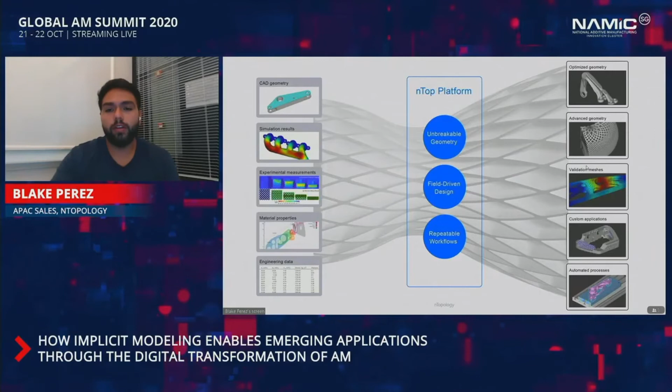I want to also talk about, and work through a few of the parts that we've designed in nTop platform, or that our partners or customers have designed, and talk to the idea of how multiple people or multiple domains were involved in its production.

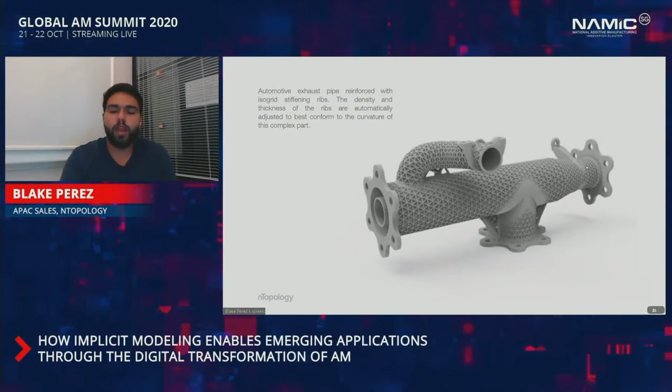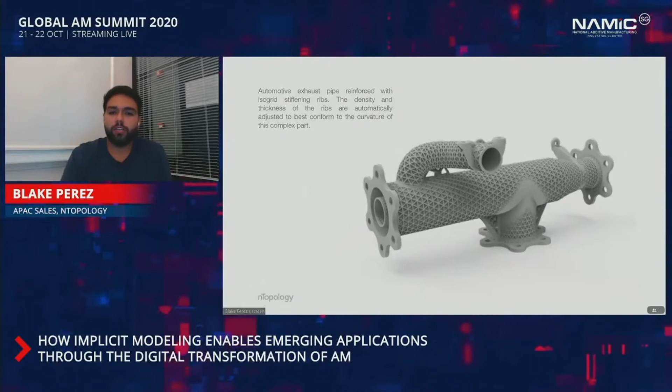So the first is an exhaust pipe reinforced with isogrid stiffening ribs. I think there's actually an error here - it's not automotive, it's used in another industry. But the density of the ribbing structure on the outside is graded nicely based on the stress considerations and performance requirements. You have as well topology optimization in the bracket region, involving a different team, to make this part lighter weight and consume less material in production. It's also functional - there's sort of a filter feature in some of the inlets with lots of perforations on the inside. It's a little hard to see, but they're there on the inside on the left of the part. So you have material reduction, engineering analysis, lightweight strengthening of the part, and the introduction of functional features inside. All of those things really require a different domain expert to come in and operate on this part. And we're able to produce it.

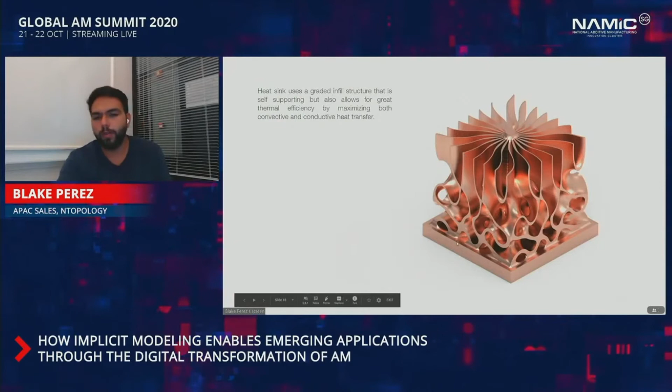Here's a heatsink that uses a graded infill structure that is self-supporting, but it also allows for great thermal efficiency by maximizing both convective and conductive heat transfer. We're able to grade the thickness of this complex structure as you move up - it's thicker at the bottom for bigger pathways for thermal conduction. This geometry also helps the air flowing through it improve the convective heat transfer, so we're able to reject more heat into the atmosphere, improving the overall efficiency of these parts. There's a lot of work we've been doing in the heat exchanger space.

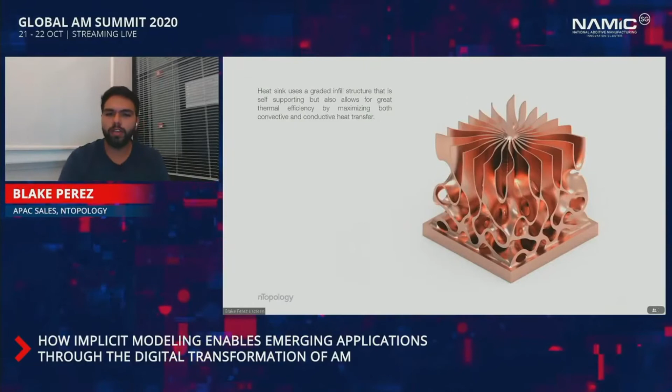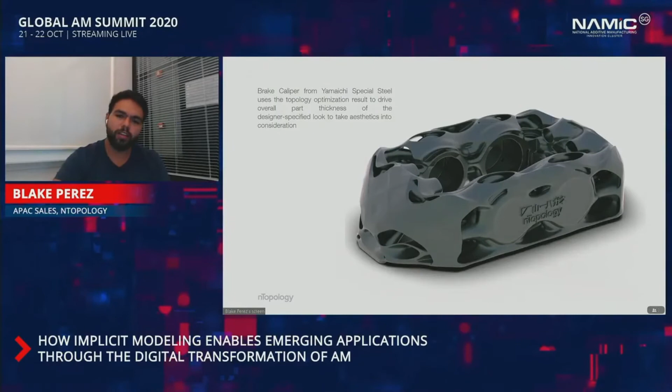It's very interesting. The last part I want to show is this brake caliper designed by one of our partners, Yamaichi Special Steel in Japan. It uses topology optimization to drive the thickness of the part. It's a little hard to see, but if I gave you a cross-section, it's thicker and thinner in different regions based on where it needs to be for strength considerations. But also you can tell it's beautifully designed - the framework for the design and aesthetic was established by the designer, and then the mechanical engineer can come in behind that and strengthen the part where it needs to be, so it can be lighter weight but still sufficiently structurally strong. This is where all these different types of teams come in and work together.

We're in the sustainability track, and I want to talk about that - what does any of this have to do with sustainability in terms of bringing people together to work together, creating these parts? I thought about this for a while, and I know I could have the same conversation you've had before, where we talk about additive manufacturing being sustainable because we're making things lighter weight, reducing fuel consumption, and it's great because we only use the material we need. All of that is true, and we've proven that. The problem I see is if you peel back the curtain, you have these really interesting, advanced and optimized parts, but teams of people spending so much time to actually design them, so the frequency at which these things occur is very low.

I feel personally that within nTop Platform and these other advanced digital tools you see today, we'll see more and more of these advanced designs that are ultra sustainable in the long run, whether you're looking at the part itself or the system it's a part of. That's what I'm really excited about. I know that you know that story, and I wanted to talk about what we're doing as a company, but also as an industry, to push the needle forward towards that goal of sustainability.